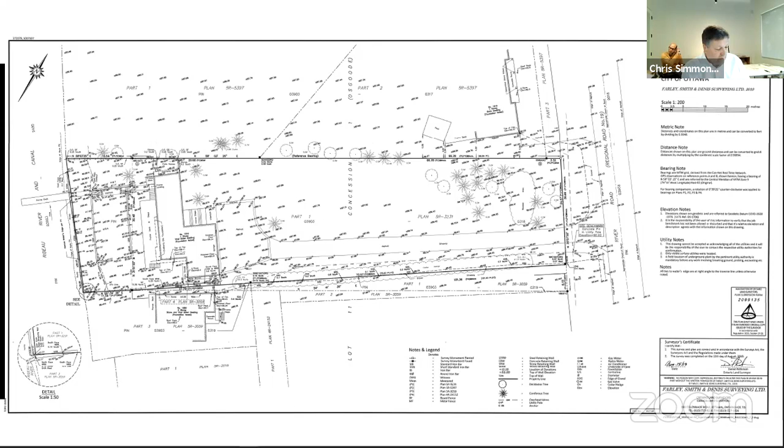One of the strange things about the survey is that the location of the building is referenced to the foundation, and the actual house extends out sometimes 3 feet beyond that foundation. We have clarified the exact dimensions on our site plans and so on. I don't know if that has created some confusion on the part of some people reading the plans. Next, please.

So this is a shot of the front of the house. It's a raised bungalow with 3 garage doors. To the left is the adjacent house. Next shot, please.

It's just another view showing you where that house is relative to the property of my client. Next, please. That's looking the other direction along the house on the road side. I don't know if you can catch that the edge of the house is beyond the stone-clad foundation by a couple of feet there. Next shot, please. That's just another general shot of the road side of the house. Next, please.

And that's a shot of the back of the house. You can see it is very much a bungalow. Adjacent houses to the right of the screen and beyond that are both 2-story houses. And our general intention is to change the roof shape and add a partial 2nd floor on the house. Next shot, please.

I think this is the most important illustration. There's an existing deck, which is 16 meters from the normal water's edge. My understanding is from the Conservation Authority's point of view and the city's point of view, therefore, that the 30-meter setback is measured to the deck and the existing house does not comply. We understand that the Conservation Authority would normally want 15 meters from the floodplain contour, and the floodplain contour and the 15-meter setback are shown in green lines.

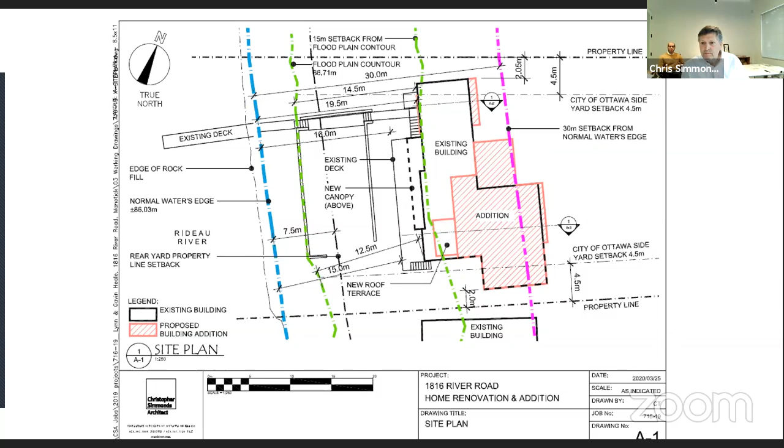We're showing 2.05 meters from the corner of the proposed little extension. Now, I understand there was a typo in the public notice saying we required 2.15 meters, and we've been told by the committee secretary or one of the members of the administration that at this hearing we can therefore only ask for 2.15. I've talked to my client, and rather than delay our hearing today, they would rather decrease the width of that proposed extension so that the variance we're asking for is only for 2.15.

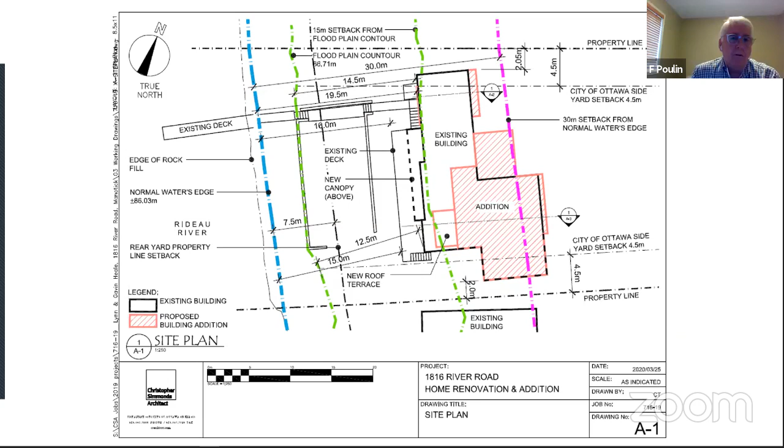So just to explain a little bit more, or should I stop and receive questions at this point, Mr. Chair? Only if you think you have more to add that'll help with your application. Otherwise, we'll proceed on. I have more to add, so okay.

I will just show you, if you go to the next shot. So at the top is the roadside elevation, at the bottom is the current riverside elevation. I'll point out that the building is very low and well below the height limit, which is around 11 meters or so. You can see that the garage from the riverside has a garage door, which is being kept, and it is actually quite a tall structure that's there right now in the garage. It's got a monopitch roof on it.

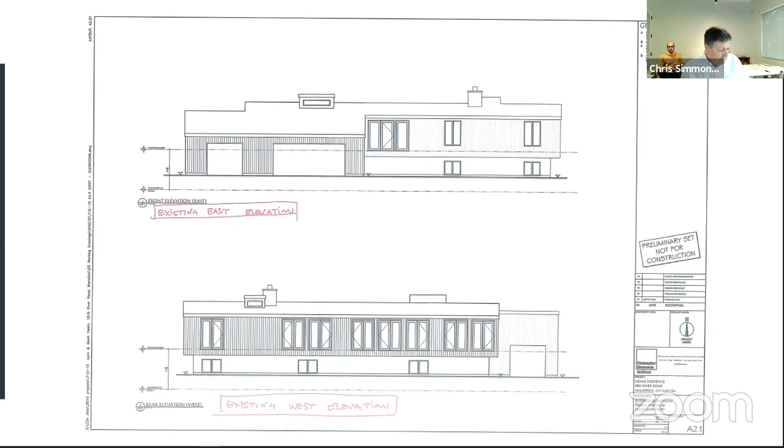And the next shot, if you wouldn't mind, illustrates the side elevations. The top one is the north elevation, which is very straightforward. The one below it is the existing south elevation, which faces an adjacent house. You can also see a cross section.

Now the proposed addition will sit above the garage, not up way high, but fairly low. So it's not really a full second story that we're adding, but in a sense a partial second story. It looks like the second story from the street. Next shot, please.

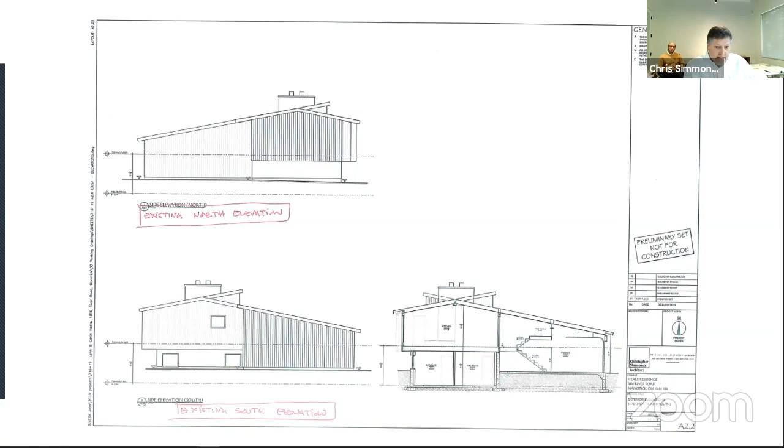And this is the revised profile of the rear. Whoop, go back one, please. You can see on the right-hand side, the black dashed line above the garage door represents the current height, and then the new roof above it. You can see that the midpoint height of the roof is well below, over 3.5 meters below the maximum building height for the zoning bylaw. And we're keeping the existing footprint. Move on, please.

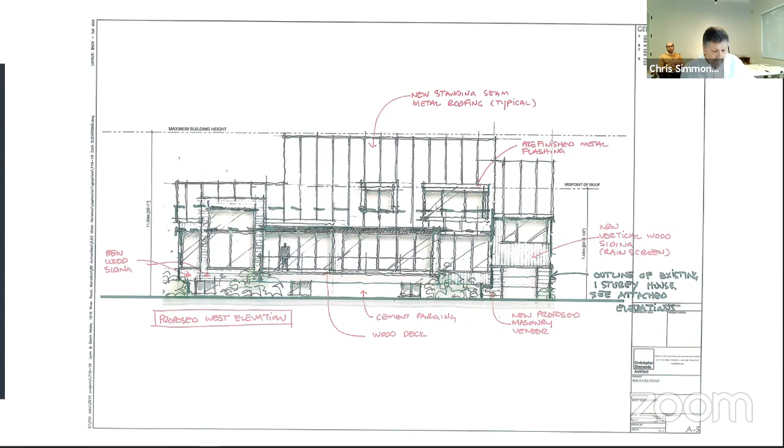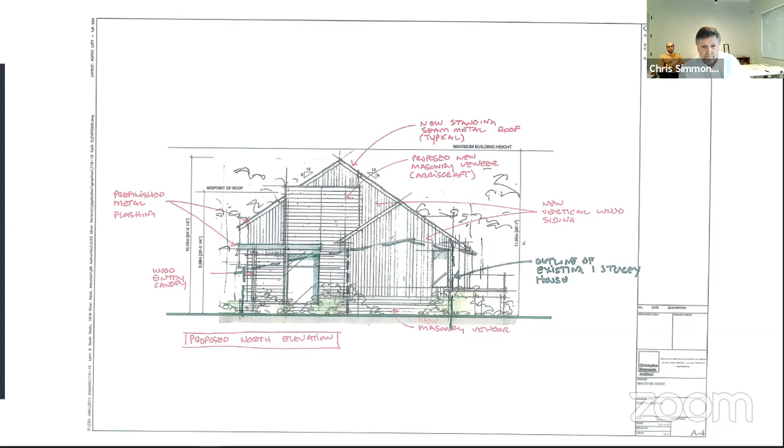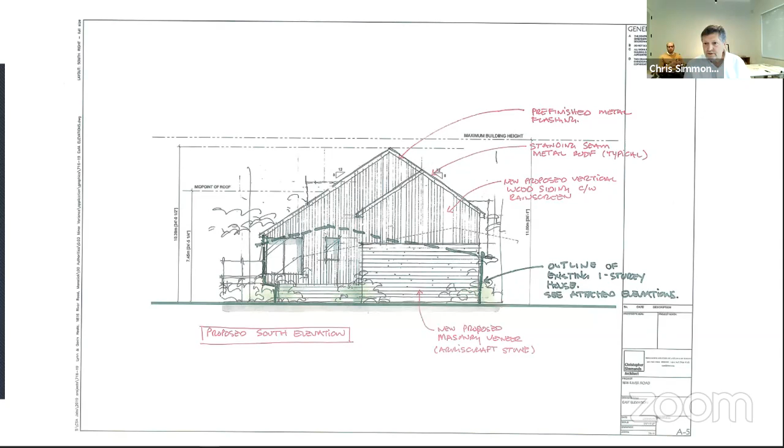All right. Okay, I think at this point I've essentially described the project to my satisfaction. I do have some slides in preparation for a couple of comments that I received, but for preservation of time constraints, I propose to leave off my presentation and just come back to answer any questions that are posed. Thank you.

Thank you, Mr. Simmonds. Mr. Walker, can you please give us some comments for the city and PIED? Oh, I'm sorry, it's Anissa, Miss McAlpine, my apologies. Thank you, Mr. Chair. I should start by indicating that I have not had the chance to review any of the information that was provided here today by Mr. Simmonds. I have reviewed what was circulated.

So there were 3 minor variances requested, and the department has different positions and concerns with each of them. I will commence by reiterating my comment on the first minor variance requested, which was, as I understood it, to permit a reduced setback to the existing deck, as indicated in the notice, as well as the 7.5-meter setback described in the notice, which was what was drawn on the plan. And in my comment, I indicated that the committee should not be issuing minor variances for existing structures.

As I understand it, the deck predates zoning bylaw 2008-250, and it was my understanding that the item should be crossed off. So we'll remove that particular request for that minor variance.

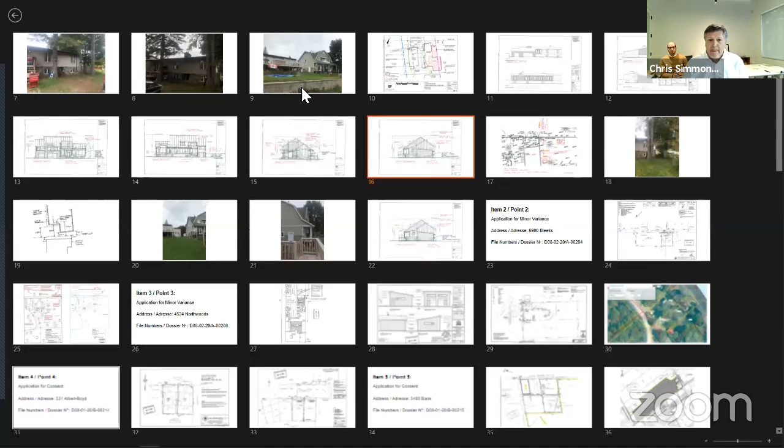Could you flip back to the colored-in site plan? We provided this to them, did we not? So this diagram was provided in the application, and it clearly illustrates where the floodplain is and the top of bank. There is a bank right there in the form of a retaining wall, and we clearly illustrated in the green setback line where the 15 meters occurred, and we clearly illustrated where the 30 meters line occurs.

So this has been in with the committee since day one. In fact, they lost the first one and resubmitted it, and they had it all over again. So this has been in possession of the committee. Now, I don't want to have a partial approval here. If the only way that the committee can approve this is to defer and let Ms. McAlpine review these documents and talk to us about it, we'll have to do that. But I just want to point out we've clearly got all this stuff in your hands.

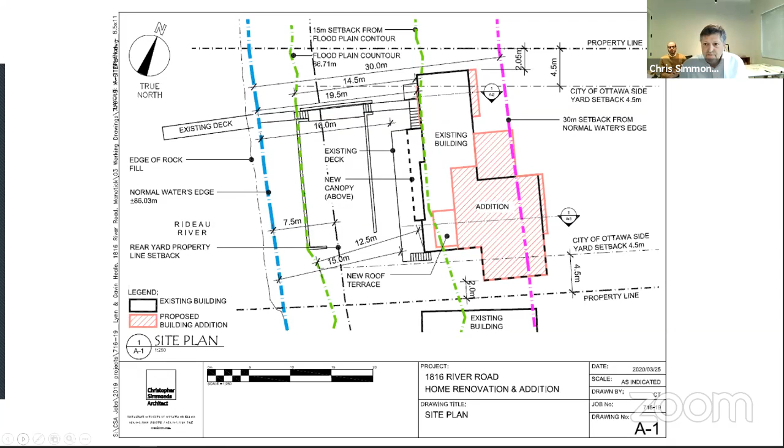Could we flip through a little bit further to where we were before? Yes, so just go on to the next slide, please. All right, so what I want to illustrate here is the location of the tree, which Ms. McAlpine was concerned about, Mr. Chair.

The new addition that we're proposing does not have foundations. It cantilevers towards the tree. The distance to the tree trunk at its closest point is going to be 2.4 meters. It's currently 3.3. And there are no lower branches in that area.

The amount of the distance at the side of the house right now is about 2.3 meters. We're proposing to add new siding and insulation on the outside of the existing house, and also because of the angle of the house, we'll lose a couple more inches as we project forward. So really only talking about...

0.15 to 0.2 meters, 6 or 8 inches increase encroachment at the side. It's plenty of room to get a bobcat through, though not enough for a large truck. However, there is a drive-through garage on the property which will be retained, and there is no house to the north.

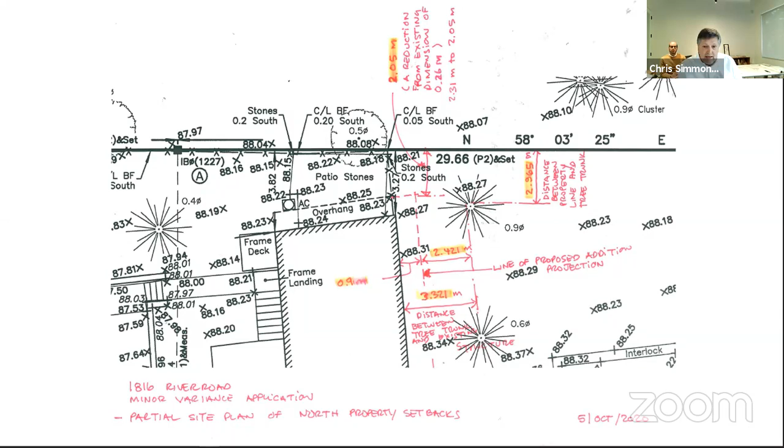If you could flip to the next picture, please. That's a shot showing the location of the tree, the fence, and the property line.

There is a tree on the neighbor's property which constrains things. You can see that there are no low branches on this tree. We're not proposing to dig around it in any way, so I don't think we're endangering the tree.

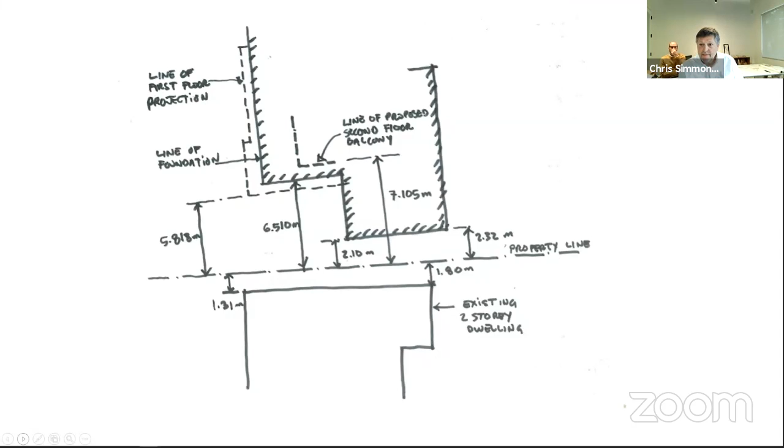Next shot, please. All right, I think you can go back. That is my response to Ms. McAlpine's comments, Mr. Chair. Thank you very much.

The conservation partners, can I ask the conservation partners if they have any comments?

Through the chair, yes, the applicant had approached us prior to submitting the application, which we reviewed. As detailed by Mr. Simmonds, the floodplain encroaches onto the property, but not beyond the retaining wall. The 15 meters referred to by Mr. Simmonds references our regulation limit. By virtue of that 15 meters, the majority of the addition, the house portion, would actually be beyond our regulation limit within the 30 meters.

The elements that would be within our regulation limit are the canopy over the deck, which as shown on the plan isn't closer than the existing deck. It protrudes out a little bit, but doesn't cover the entire deck. There's a bit of a terrace on the second floor that would fall within our regulation limit, but ultimately the proposal being largely over the existing structure was not a concern to the Conservation Authority in terms of the work.

The comments that Ms. McAlpine mentioned in terms of how they're measuring the setback, I defer to the city in terms of how they're going to approach the number in the variance. But at the end of the day, the proposal itself would be consistent with the goals and objectives we're trying to protect. Thank you.

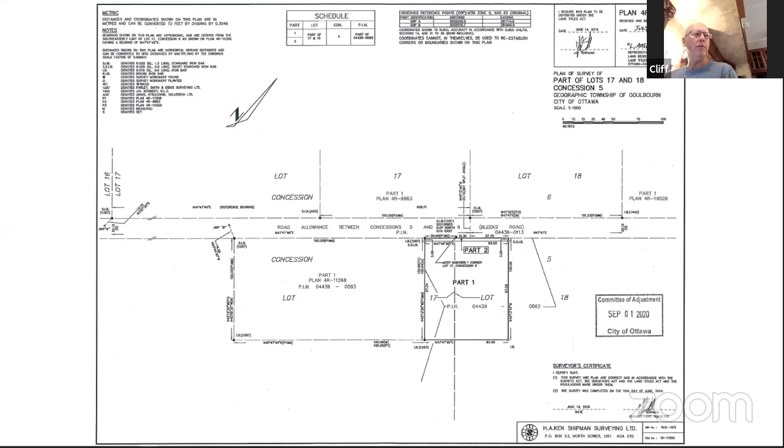Up until the point that we're at this particular minor variance now, I've not been able to get the permit issued. So the minor variances are sought to allow us to have the permit issued so that we can begin the build. Again, it's getting late enough in the year that we may have to delay again, but nonetheless, we want to proceed. It's even more important now to have affordable access to home ownership—it's gone absolutely crazy out there. So that, in a nutshell, is where we're at.

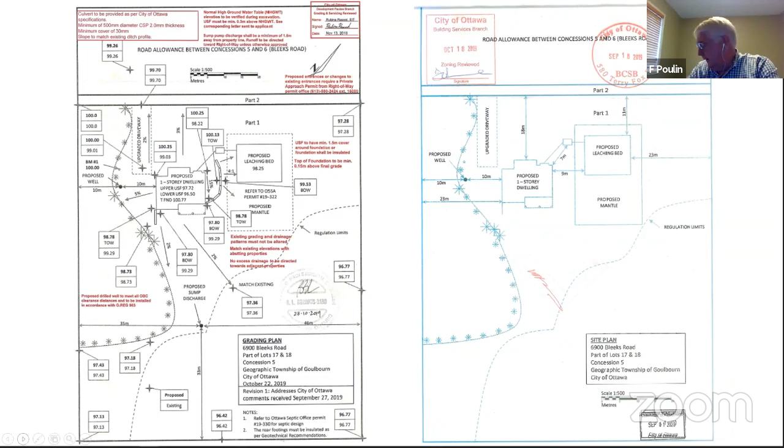Thank you, Mr. Poulin. I'd like to ask Mr. Walker on behalf of the city to make some comments. Thank you, Mr. Chair. Staff has reviewed the application and has no concerns with the proposal.

Thank you very much. Panel, I'd like to ask Mr. Lewis if he has any comments or questions. Yeah, a comment to Mr. Walker: the entrance for this lot will be onto an unopened road allowance, am I correct? Yes, that's correct. So is the city's position that we can do this now? We haven't been able to. So, through you, Mr. Chair, the department reviews applications on a case-by-case basis, and in this particular circumstance, the department has no concerns. The applicant is working with building code services and planning services to have the variances granted and have the building permit issued so that they can have access to the property.

So have we got confirmation from the road department? We have a snowplow goes down, a school bus goes down, hydro goes down, garbage truck goes down, mail car goes down.

So while I can't speak for every department in the city, I can confirm that planning services is working along with building code services so that the applicant can have their permit issued so they can have access to the property. I have a real problem with having access down an unopened road allowance. We've never allowed that before unless the applicant built the road up to standards.

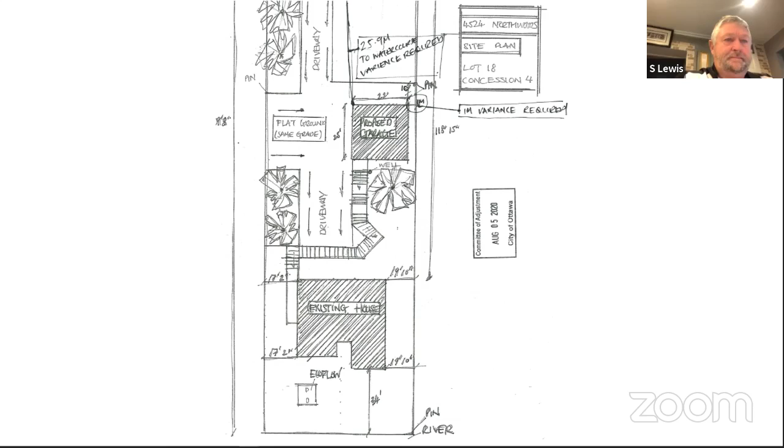So what I'm proposing is a detached double garage on my property. I live out in Woodlawn, and the dimensions are 22 by 25, and I'm applying for 2 variances today. One is within a 30-meter setback of a watercourse, which is not really much of a watercourse—I think it's more of a ditch from my neighbor's yard across the street, but that is outlined in the survey. The other is to reduce the interior setback from my neighbor's yard to mine down to 1 meter.

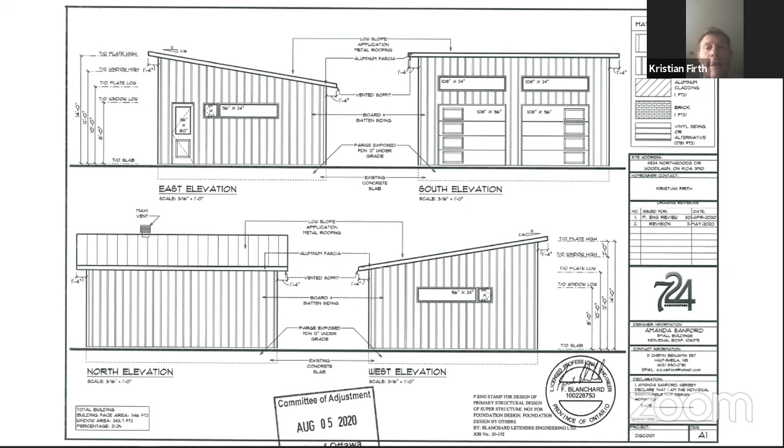So as you can see, it's a lean-to roof, 14 feet at the front going down to 10 at the back, so it's lower than both my neighbors' garages. If you want to scroll through again, you can probably see a cross-section drawing there. There's the site survey—on the right-hand side there is the Ottawa River, Buckham's Bay, which is significantly far away from where the garage pad is, about 200 feet.

If you look to the left-hand side, you'll see where the city road is, Northwoods Drive. The actual watercourse itself is to the left of there. So the distance I'm requesting is 25.9 meters from the 30-meter setback required from a typical watercourse. I wish I had more detail—it's not as detailed as the first application. I'm just applying for a double garage with 2 variances.

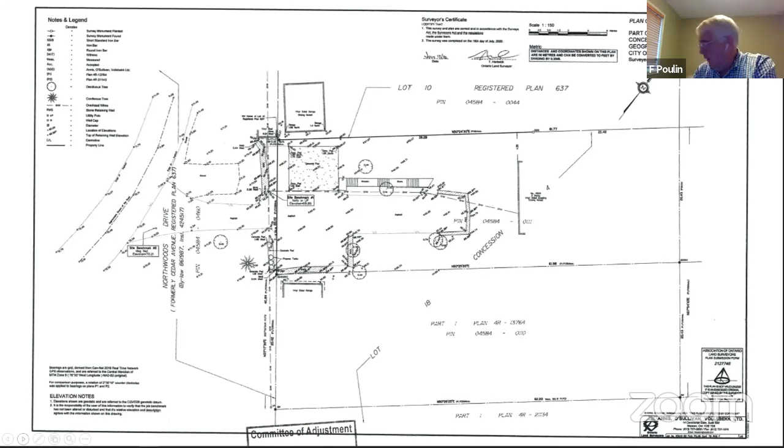Thank you, Mr. Firth. I'd like to ask Mr. Walker to make some comments on behalf of the city, please. Thank you, Mr. Chair. The department has reviewed the application and has no concerns with it. Staff is satisfied that the 4 tests are met in this instance. Staff, thank you very much.

Thank you, Mr. Walker. Any comments, Mr. Vivort? No, I'm fine with it. It seems to meet the 4 tests, and I believe the conservation partners in this case are also satisfied. Thank you. Mr. Otto, any comments, questions, or concerns? No comments, thank you. Mr. Lewis? Nope, nothing. Ms. Chandler? No concerns.

Okay, thank you very much. I'd like to ask the committee if they'd like to approve this application. All in favor? Your application is approved, Mr. Firth. Thank you very much for your time. You're welcome.

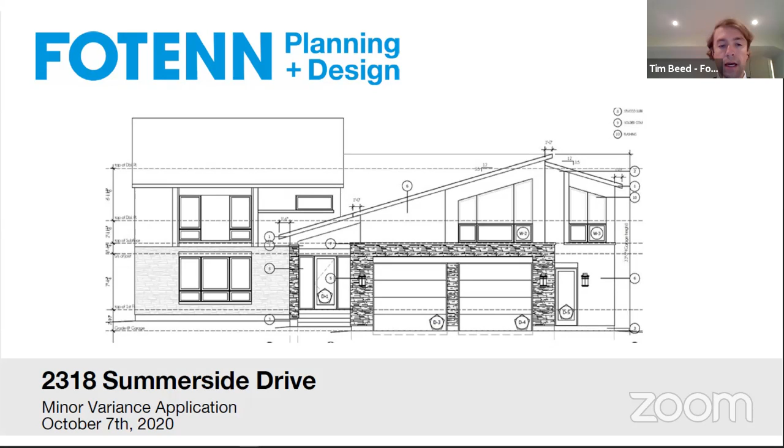I'll go through quickly and then leave some time for questions at the end. The subject property, and I'll go to the next slide, please.

In the area, residential properties are located directly north, south, and east of the property, abutting the Rideau River. Further afield, the area consists of more rural residential properties, agricultural and woodland, located approximately 7 kilometers from the village of Manotick, 3.5 from the village of Kars. Next slide, please.

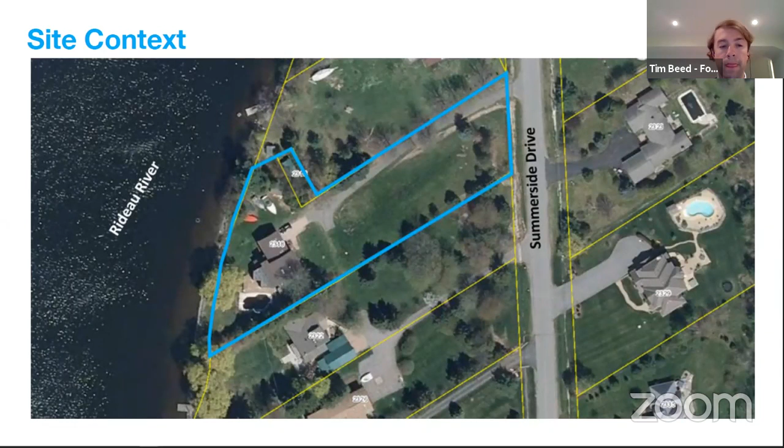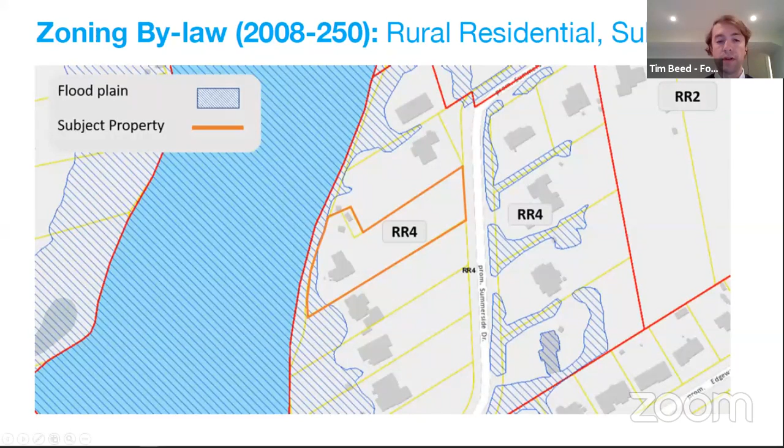I'll get back to the zoning and official plan designation in the rationale to provide some context. The subject property is currently zoned rural residential, subzone 4, with floodplain overlay on the portion abutting the river, on a small portion of the property. It's designated general rural area in the official plan.

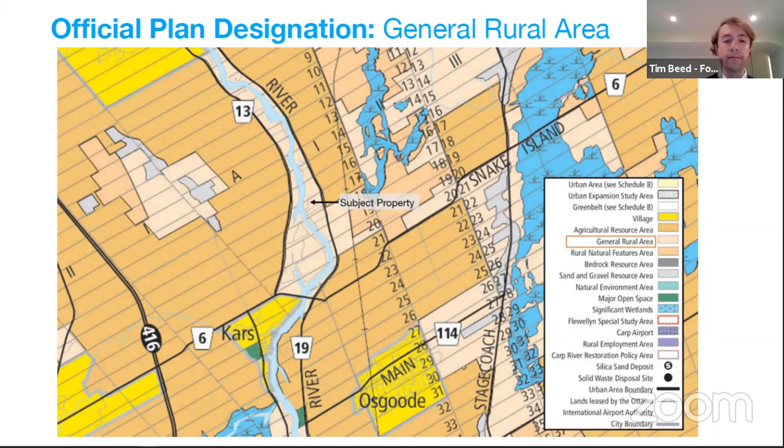Next slide, please. So I'll get into the details of the application. The application for minor variance pertains to 3 separate yet concurrent construction projects on the property, as detailed throughout this presentation. In summary, the property owner proposes to construct a 2-story addition to the existing detached dwelling.

And a two-story addition to the existing detached dwelling consisting of a garage and home office in the front yard. The proposed addition is 2 stories, 7.2 meters in height, with a total gross floor area of around 92 square meters. We can see that in the foreground there.

The second portion of this application is a second-story deck at the rear of the subject detached dwelling, with a total area of 29.5 square meters and a height of 2.74 meters from grade. That's the triangular portion in orange here, kind of in between the existing corners of the existing dwelling.

The third aspect of this application is an addition to the existing accessory building located along the northern property line. The proposal is to renovate the existing accessory building, which currently has a floor area of around 20 square meters, located 8.5 meters from the property line to the north and 1.74 meters from the eastern property line. The proposed addition will extend from the south facade of the existing building, resulting in a total cumulative area of 43.9 square meters and a new setback to the eastern property line of 0.93 meters, with a maximum height of around 3 meters. The areas of construction are indicated in orange.

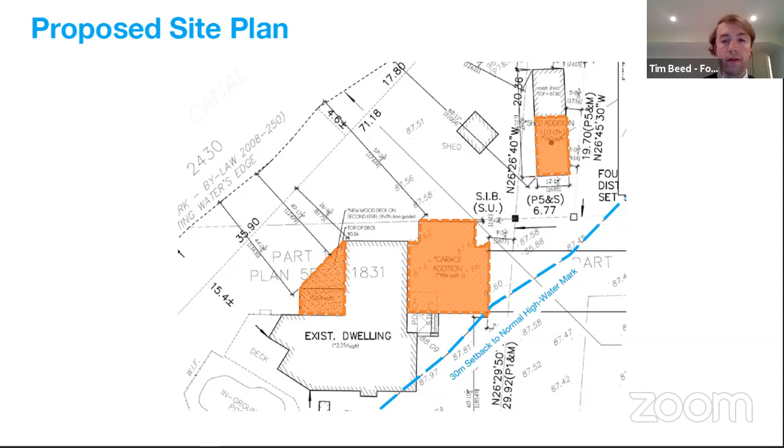I'll go over a few slides here. The proposed addition to the detached home is seen on the screen here as a 2-story garage and office building.

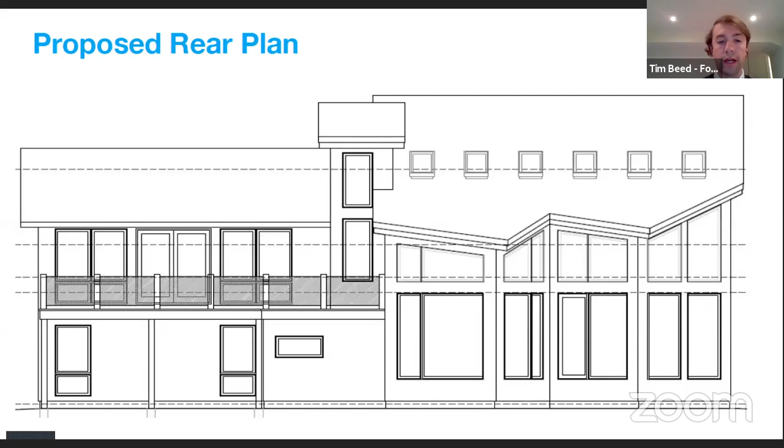Here we can see an elevation of the proposed two-story deck to the side and rear of the property, and another elevation showcasing both the proposed 2-story addition to the garage and office space attached to the existing dwelling, as well as the deck to the side and rear.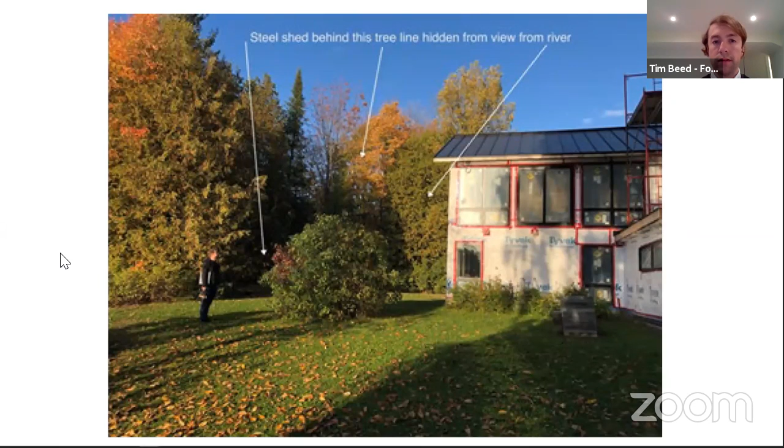Another angle or viewpoint of the significant tree grove, which will screen the proposed additions from the river viewplanes and from neighboring properties.

This is indicating where the proposed new second-story deck will fit into the existing built form of the single detached home, so it won't protrude in any way from the existing footprint.

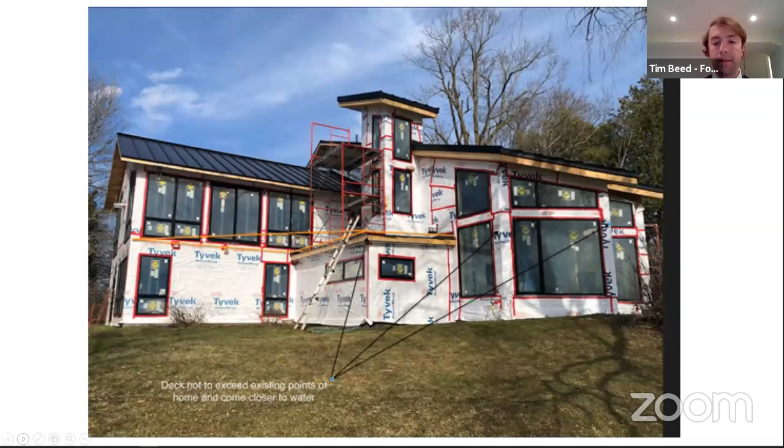I'll go over a few key points on how this project addresses the test of a minor variance. As mentioned earlier, the subject property is designated general rural area in the official plan. The general rural area permits a range of land uses meant to be appropriate and compatible for a rural location. The proposed variances conform to the relevant policies of the general area and maintain the intent of the designation to preserve rural character and scale of development. These are all modest additions to the existing built form on the property.

Most importantly, the variances being considered relate to how they impact adjacent properties. The overall design of the proposed development will complement the massing patterns, rhythm, and character of the existing dwelling, using similar, complementary, and respectful materials and low-profile massing to integrate into the area.

In regard to proximity to the watercourse, the proposed garage and office addition is located so that it will be buffered from the river by the existing primary dwelling. The remainder of the addition to the accessory building is set back significantly from the high water mark and benefits from existing substantial tree cover. The proposed second-story deck fits within the existing built form and is actually closer to conformance than many portions of the existing buildings.

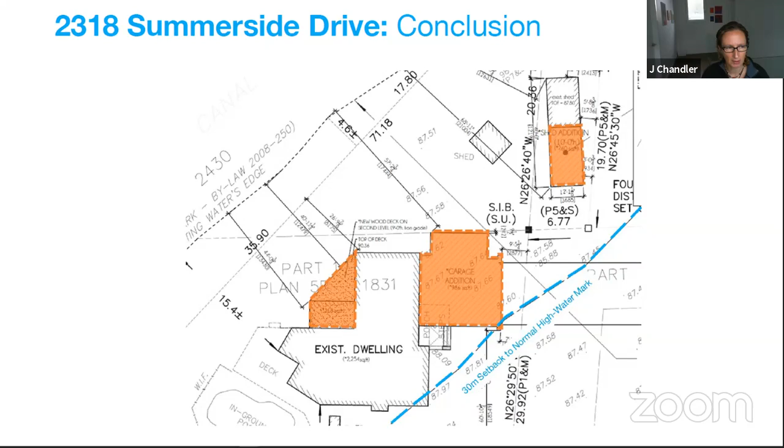I guess my question would be to the Conservation Authority. You mentioned a regulatory permit has already been issued for the garage addition. Is that correct? Yeah, through the chair, that is correct. A predecessor of mine had reviewed the garage and issued a permit for the garage component only.

And then through the construction or planning process, they've decided to include these other components to do them all at the same time. That's why we're going to require a revision to the existing permit, as well as basically a new review for the two other components that have been integrated. We've had discussions with the applicant on how to address those.

So again, I'm not particularly concerned about the deck or the addition to the auxiliary structure, but regulatory permits aside, is it your professional planning opinion that that part of the variance does meet the four tests? Through the chair, I believe so. Thank you.

Mr. Revord, any questions, comments, or concerns? None, thank you. Mr. Otto, any questions or comments or concerns? No, I'm okay, thank you. Mr. Lewis, any questions or comments or concerns? No, I'm good with this application, thanks.

Okay, thank you. I'd like to ask the panel to approve this application. All those in favor? Your application is approved, Mr. Beed. Thank you very much. Thank you, Mr. Chair and committee.

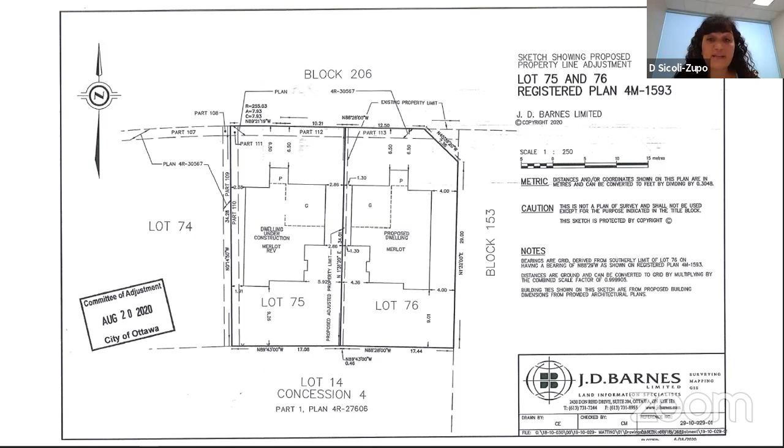So what happened is a draft R plan, which I believe you have as well, has been created, which has the strip of 0.46 meters from front to back, being parts 1 and 2 on the draft R plan, carved out. The application today is to sever the 0.46 meters from lot 75 and add it to lot 76 to accommodate the home to be built on lot 76.

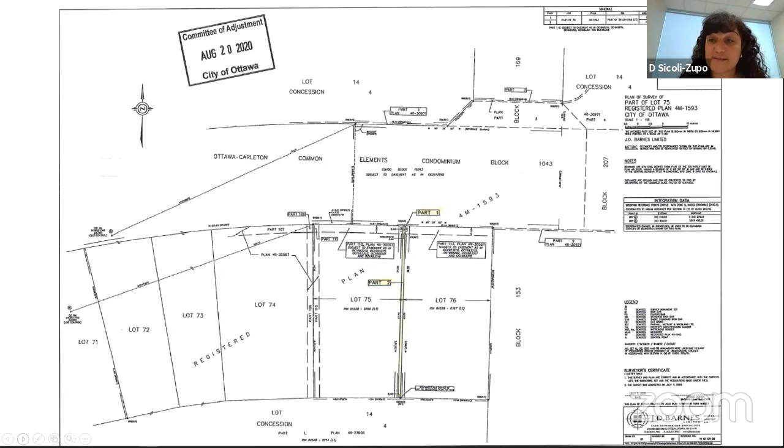Okay, thank you. Ms. McAlpine, could you please give us an overview of the city's comments? Thank you, Mr. Chair. Through you, Mr. Chair, the city has no concerns about the application and simply asks that should the application be approved, the standard conditions included in my report be included.

Thank you, Ms. McAlpine. Mr. Revord, any questions or comments? None, thank you. Mr. Lewis, any questions or comments? I could not hear you, your mic is muted. No, I'm good with the application.

Thank you. Thank you, Mr. Otto, any questions or comments? I'm good with it, thank you. Ms. Chandler, any questions or comments? No, all good, thank you very much.

I'd like to ask the committee to approve this application. All in favor, please raise your hand. Your application is approved, Ms. Sicoli-Zupo. Thank you very much. Thank you.

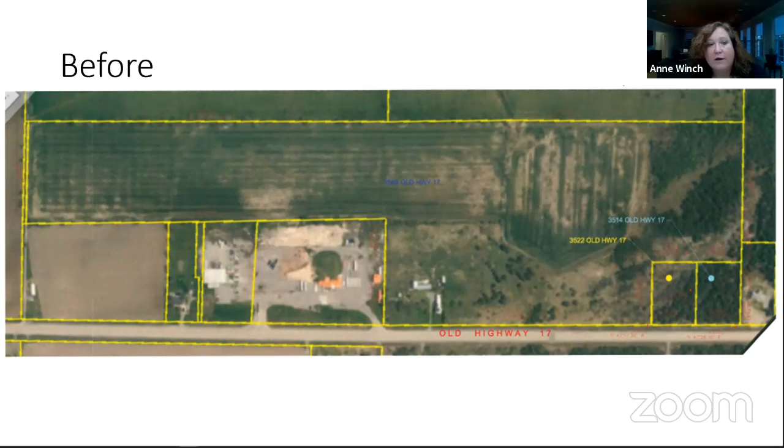Thank you. Please proceed and provide a brief explanation of your application today. So I'm working with the Burdens, and they have a property on Highway 17. Originally they had a farm and 2 lots that had previously been severed. What we're doing is a lot line adjustment to attach one of the lots that has road access from Old Highway 17 to incorporate a parcel of land at the back. As you can see, the one on the far right is the before - there's 3 lots and then the entire parcel. Now we're going to show the after photo. So the after photo shows adjusting the lot line to incorporate the parcel at the back, giving road allowance at Old Highway 17, creating or adjusting the lot line for the parcel with the house and barn, and then retaining the original lot.

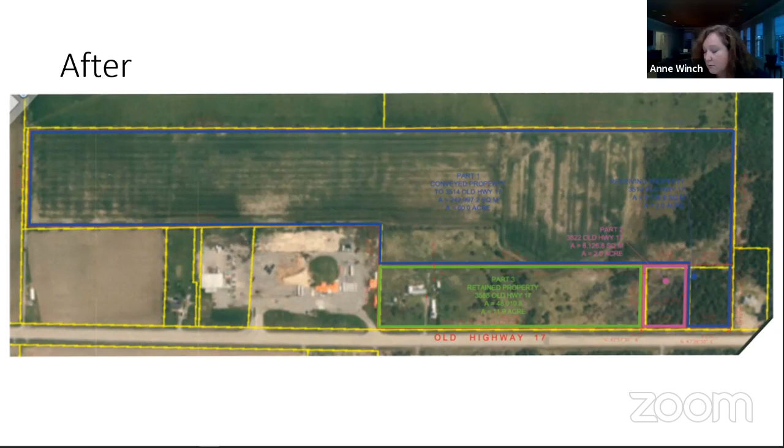Thank you. Mr. Walker, can I ask you to comment on behalf of the city? Thank you, Mr. Chair. The department has reviewed the application and has no concerns with the proposal, subject to the condition submitted. Thank you very much, Mr. Walker. Do our conservation partners have any comments to make? Through you, Mr. Chair, no, the Conservation Authority has no concerns with the application. Thank you very much, Ms. Ogden.

Now I'd like to proceed to the panel, ask if they have any questions or comments. Mr. Otto, any questions or comments with respect to this application? Oh, it's perfectly clear, thank you. Mr. Revord? No comment or question. Mr. Lewis? All good. Ms. Chandler? I have no comments. Thank you very much, I'd like to ask the panel for approval of this application.

All in favor of the approval of this application? Thank you. Your application is approved, Ms. Winch. Great, thank you very much. Thank you.

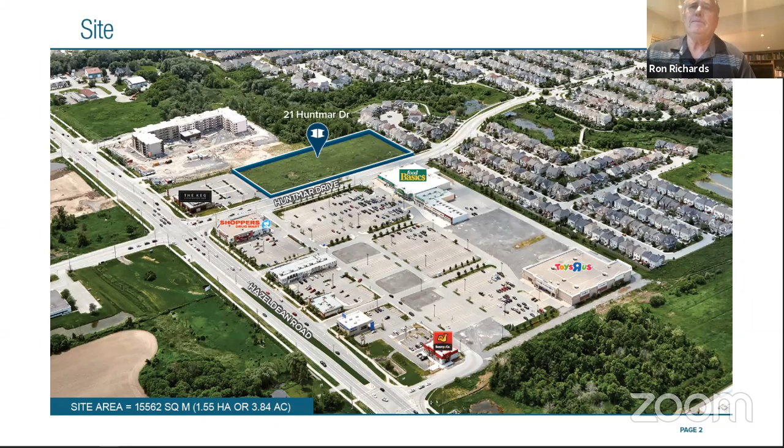The requested variance is for an additional 5.8 meters in height over the permitted 15 meters, for a total of 20.8 meters. The minor variance is required to accommodate 1 additional floor and increased height per floor. The bylaw permits 5 stories at 3 meters per story, which in today's world is very difficult to build within, given increased ground floor ceilings for amenity areas in the lobby and an increased height per floor to accommodate the cold form steel framing I-span construction method, which includes a concrete floor for each level.

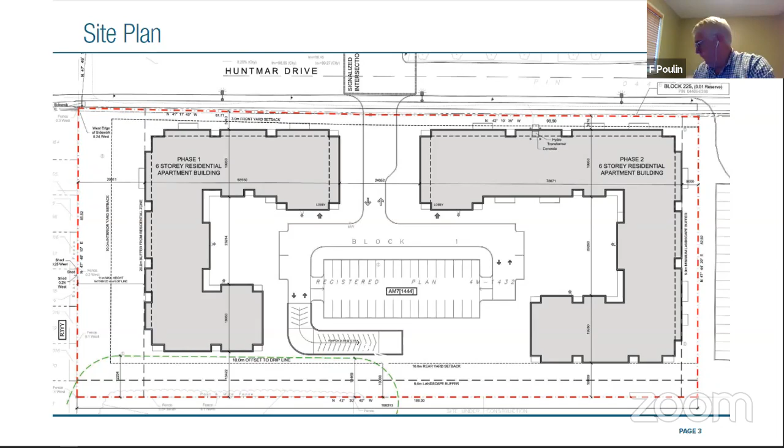Thank you. Thank you very much. Ms. Ramirez, are you able to comment on behalf of the city?

Hello, yes, through you, Mr. Chair. Staff have no concern with the minor variance to permit a building height of 20.8 meters for a building located greater than 20 meters from a residential zone. The department requests that any approval be worded to allow for modifications during the site plan control process.

Thank you, Ms. Ramirez. And I note that Victoria McCrum is also listed here. Yes, Ms. McCrum is a colleague of mine, and unless there are specific questions, no need for her to comment. Okay, thank you very much.

Thank you. I'd like to ask the panel for their comments. Mr. Lewis, any questions or comments? No comments, I'm good with this one. Thank you very much. Mr. Otto, any questions or comments? And thank you. Thank you.

Ms. Chandler, any questions or comments? None. Thank you. Mr. Vervoort, any questions or comments? I don't have any concern with it because it's going through site plan. I just wanted to confirm that this isn't increasing the density, the number of units - I think they are staying the same. Is that correct? That is correct. Okay, thank you.

Given that there's no further comments, I'd like to ask the panel for approval of this application. All in favor? Your application is approved, Mr. Richards. Thank you very much. Thank you very much, Mr. Chairman.

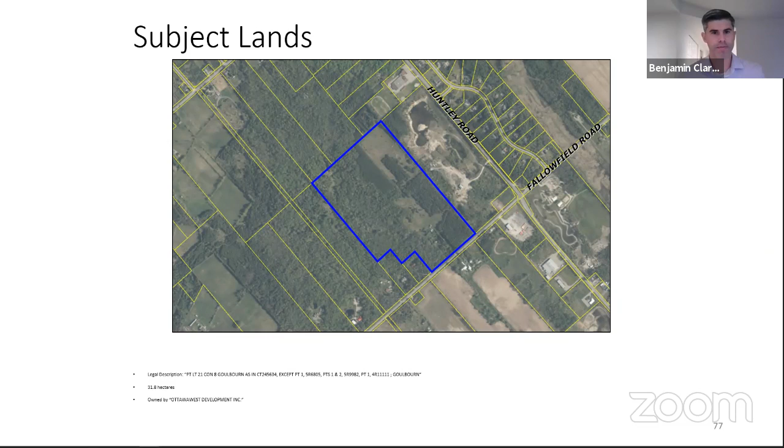So the subject lands, committee and staff are familiar, 31.8 hectares, southwest of Huntley and Fallowfield Road intersection, just south of Stittsville and Goulbourn. Next slide, please.

This is a severance sketch. Now this severance is now conditionally approved. Committee members will recall that the lands have development potential, but that there are several constraints, including from a natural heritage standpoint, in relation to a proposed livestock facility, stables, the floodplain, and adjacent properties that have potential for aggregate extraction. Next slide, please.

These are the retained lands, which are the focus of the variance application. They're 21.3 hectares and have approximately 113 meters of frontage on Fallowfield Road. Next slide, please.

So this slide identifies the subject lands in the context of their surrounding. The Argue pit, which is a largely inactive pit today, however with an active pit license, it's been used for the most part over the last 20 years as stockpiling for material. It's adjacent to the northeast. It's designated sand and gravel resource area in the city's OP and is zoned ME2 in the zoning bylaw.

Surrounding the Argue pit to the north is the Goulbourn Middle School, and then opposite Huntley Road is approximately 30 residences on Kimini Drive. To the south of the subject lands opposite Fallowfield are largely agricultural lands owned by Walton International. Walton is advertising these lands as having future urbanized development potential. These lands are designated agricultural resource area, however, in the official plan and have ME3 zoning. Next slide, please.

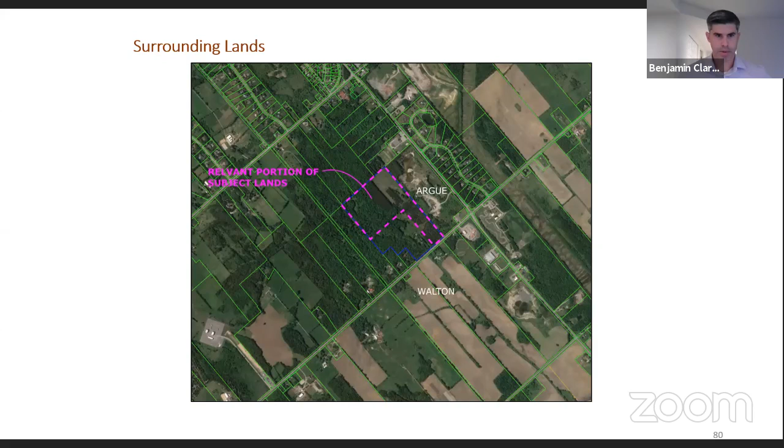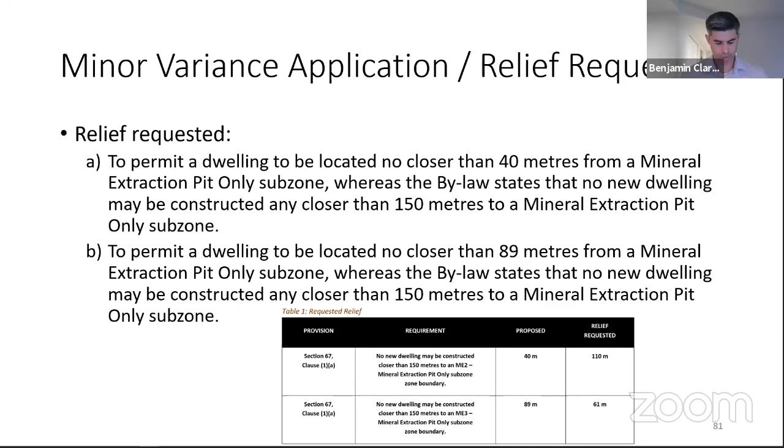So the application in front of us today relates to clause 67, or section 67, of the bylaw. Clause 67(1)(a) requires as-of-right development to be located a minimum of 150 meters from ME2 or ME3 zones, in order to, and I'm quoting here, help ensure that new dwelling units are not located in close proximity to an existing or future noise or vibration generating use such as a mineral extraction operation. This application requests minor and appropriate relief from this requirement to allow a dwelling to be located 40 meters from the ME2 zone, the Argue property, and 89 meters from an ME3 zone, which is the Walton lands opposite Fallowfield. Next slide, please.

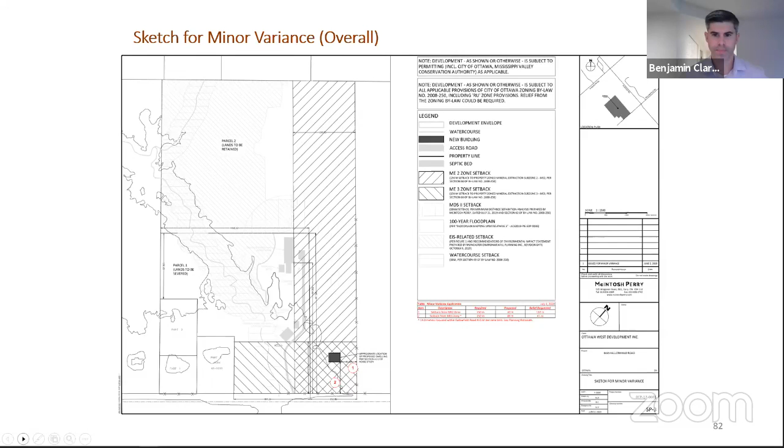So this is close-ups of the sketch. It shows the proposed location of the dwelling, 40 meters from ME2 to the east again. And then you'll see that 75-meter setback is shown from the front property line.

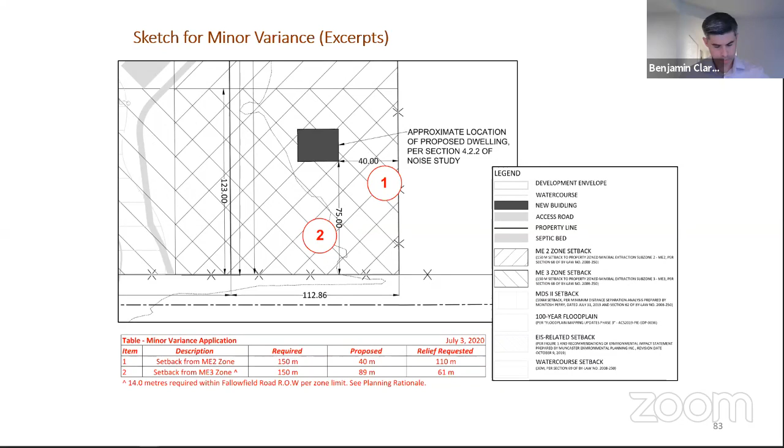The actual relief being requested reflects 89 meters, and that additional 14 meters sits within Fallowfield Road and represents the distance from the front property line to the ME3 zone boundary, which is in the center line of Fallowfield Road. Next slide, please.

I'm going to start in on the 4 tests. So first is the intent and purpose of the OP. The subject lands are designated rural natural features. Policies of the general rural area are also applicable.

Policy 372 establishes that it is intended that the general rural area, and I'm paraphrasing here, accommodates uses appropriate for a rural area, such that development will not preclude or resist other non-residential uses. In this regard, policies of section 374 specific to mineral aggregate resources are probably most relevant to this application.

The noise study goes beyond this and considers, we'll get into it in a moment, the theoretical full operation of the Argue pit, which is the only licensed pit that needs to be considered. It also contemplates the full concurrent extraction operation of the Walton lands and full operation at the Tarstone landscaping facility in the vicinity as well. Batching plants are also reflected in both the model for both of the extraction related properties. Next slide, please.

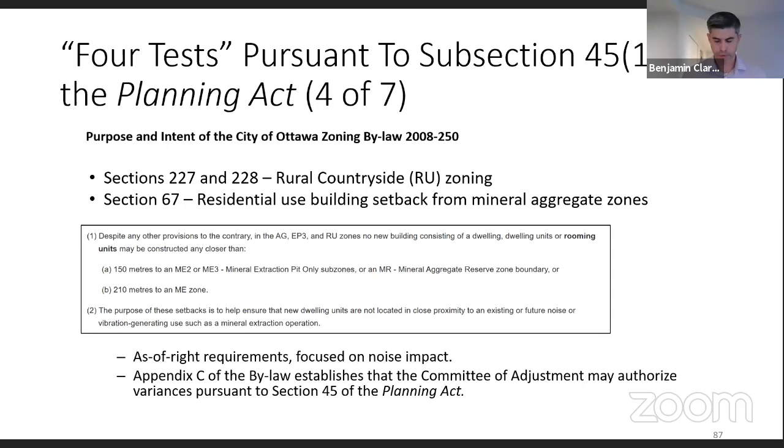What's important to note here is that these provisions apply to unmitigated, unstudied scenarios. It's reasonable to conclude, therefore, that if you provide evidence that confirms that the noise from hypothetical full concurrent operations of 3 noise generating facilities in the area meets the recommended MECP objective sound levels, the intent of the bylaw is upheld. To summarize, the bylaw is concerned with noise. If you prove that noise is acceptable, the intent of the bylaw is maintained.

Next slide, please. So this slide provides a bit of background that explains minor in nature. There's a quote from an OMB decision here that establishes that the minor in nature test is widely accepted as being a test of impact. And it's not any impact, but undue, severe, or unreasonable adverse impact.

This is really important in this one, because to be frank, we're dealing with a big number when it comes to the relief being requested, but that big number is not what needs to be focused on in this particular application. The noise study, again, with respect to minor in nature, confirms that the recommended MECP objective sound levels are met. Next slide, please.

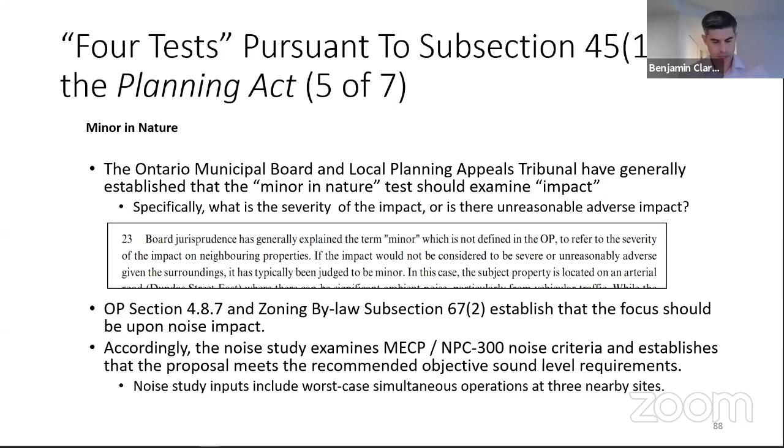Given the very conservative noise study methodology and the low likelihood of full simultaneous operations of the facilities, including the two batching plants, the dwelling and the variances do not represent unreasonable or undue adverse impact.

That's clear to me. This slide contains excerpts from the planning rationale, which refer to the fact that a noise warning clause is also recommended, and this will help prevent any impact upon the nearby aggregate related properties. It's worthwhile noting that the owner of the aggregate operation asked for this clause when consulted during the severance.

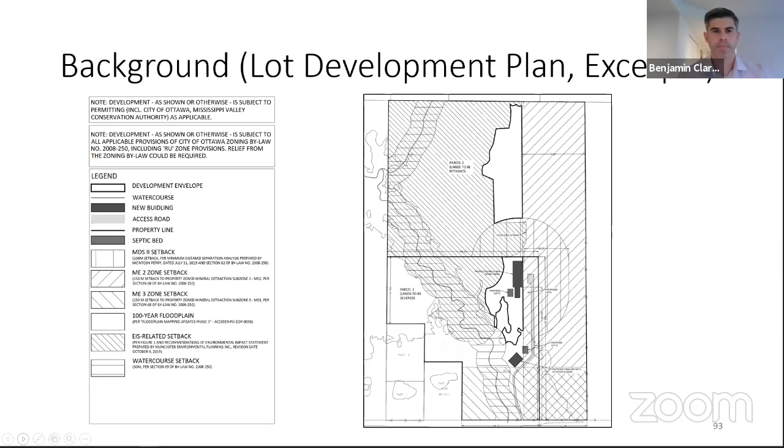Next slide, please. So staff comments, I'll try and keep this as brief as I can. Agency comments largely do not raise any issues. The MVCA does identify the need for a permit given the location of the proposed dwelling within the regulated area, and it's relatively close to the floodplain.

Planning staff comments are not supportive. Staff assert that the proposal represents a departure from what had been discussed during the severance. Trying to keep it brief here, staff are vehement in their defense of PPS and official plan policy that seeks to discourage development in close proximity to aggregate.

Staff asked questions about a berm that had been identified in a previous, preliminary version of the noise study. Staff conclude that the variance, in their opinion, is not minor and that it could impact the viability of aggregate, despite the noise study suggesting otherwise.

Staff's comments, in my opinion, are problematic and in some cases could be misleading to committee members and the reader. It's clear in my mind that the lot development plan was foremost intended to identify as-of-right development potential on the retained and severed parcels, to ensure committee members and staff will be comfortable proceeding.

Variances were in fact discussed openly with staff and committee on several occasions, and the proposed location of the dwelling is the same as it was depicted in the original preliminary noise study. This is explored in detail in my September 23rd response to staff's initial round of comments.

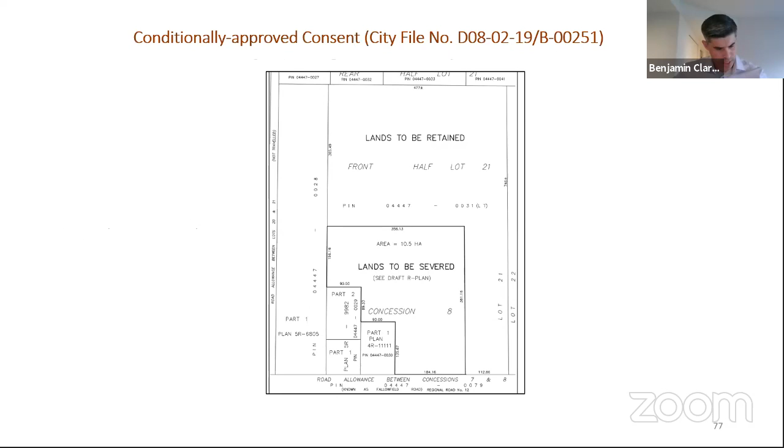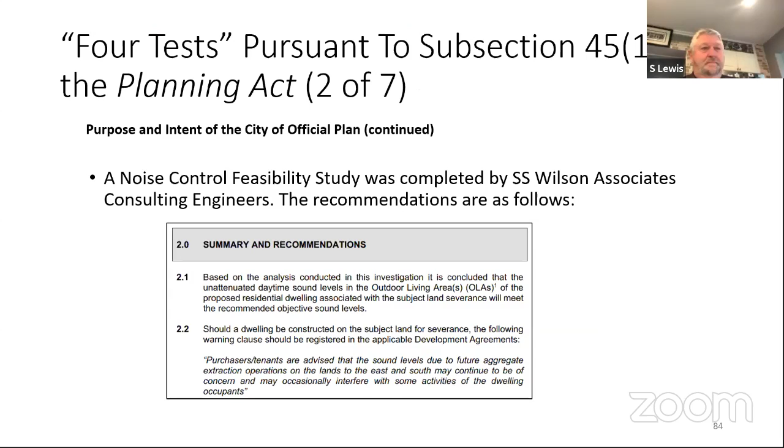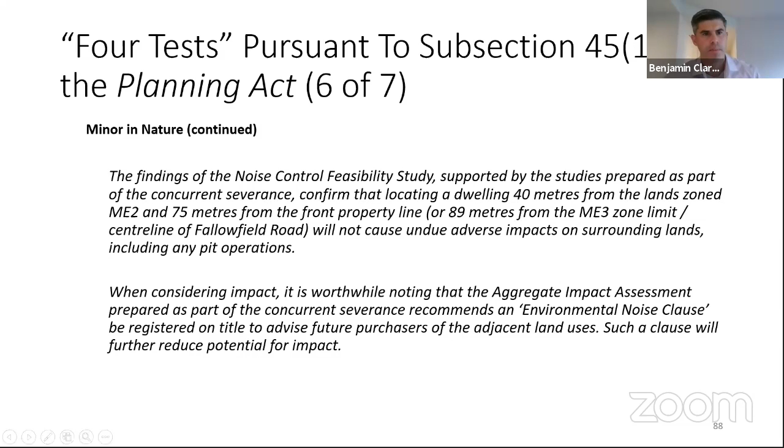This would be, I believe, slide 12, and I don't know which number that is in the committee's slide. I think it's page 6 maybe. Keep going another couple slides. Should be the next one. Oh, my apologies, we're getting ahead, back a couple. One more. Here we go.

So if I'm correct, the noise contours, that's what I'm looking at, right? Were drawn from the existing operation layout? Incorrect, there's no existing operation. So the property, I'm not saying incorrect in an accusatory way, just for clarification, hasn't been used for about 20 years, just for stockpiling of material.

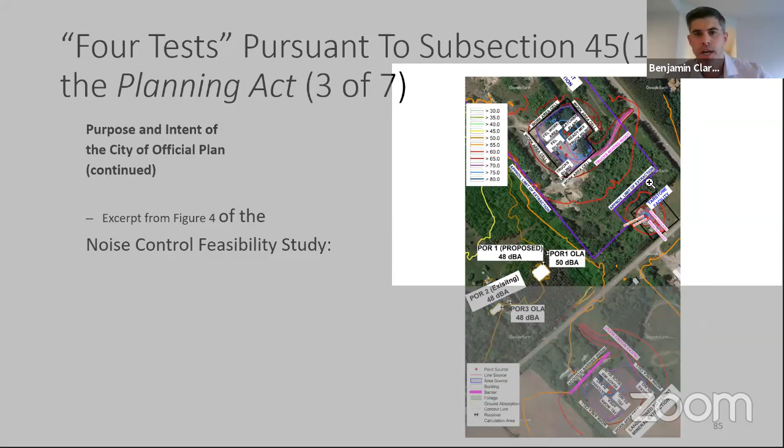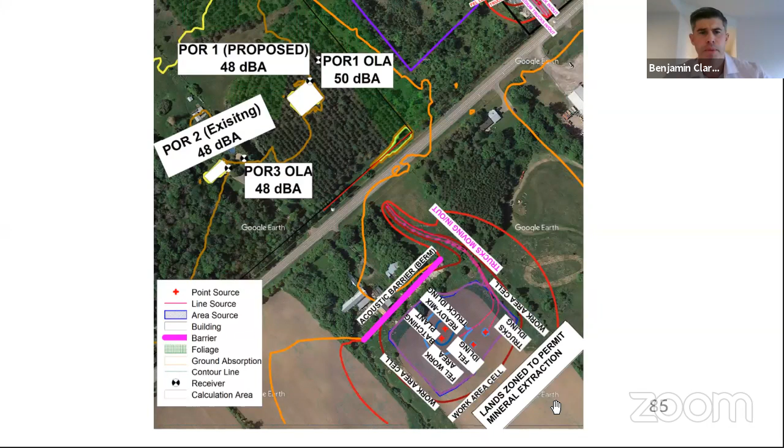So like the quote unquote facility on the Walton lands opposite Fallowfield, Assad and his team have had to come up with assumptions with respect to where a batching plant might go if they pursued ECA approval and got ECA approval to locate a batching plant on the subject lands. Similarly, they make assumptions about the location of trucks idling and so on.

Can you go back up north to the Argue lands coordinator? So there's a site plan associated with this, and it shows a cement batching plant on it as well. Where is that denoted on this? It's within the work cell. The batching plant is kind of in the northeastern quartile of the work area cell.

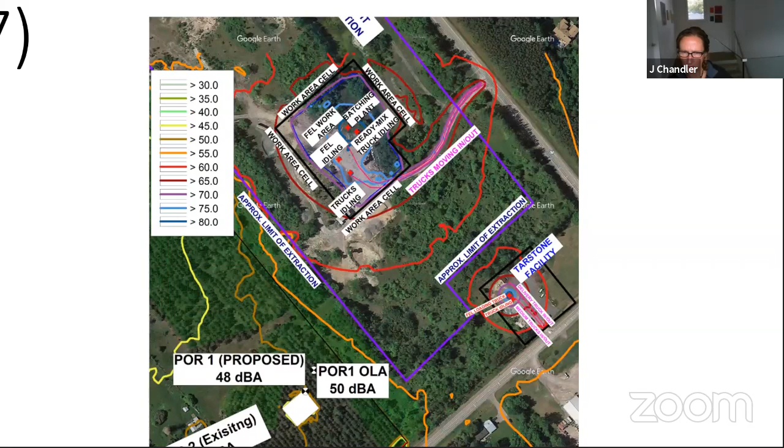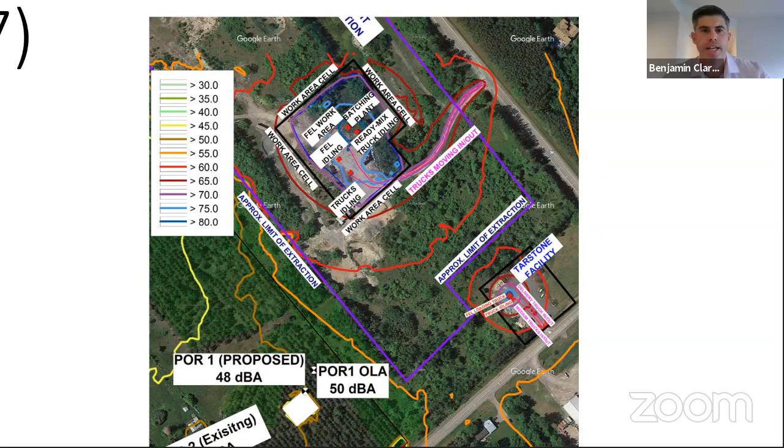All right, so this was done based on the site plan that is approved by MNRF. Well, the site plan that was approved by MNR, and I discussed this with folks who worked in aggregates for decades, for the better parts of their careers at McIntosh Perry. The site plan does include a batching plant, but there's no question that since there hasn't been a batching plant on the subject lands, any new proposal for a batching plant would be looked at as a new proposal requiring an ECA.

So the actual eventual location of the batching plant would, if I was working on these approvals, probably go at a location on the property where the noise impact on adjacent properties is minimum. So you're kind of getting to where my concern is. Yeah.

For an operator on an aggregate site to make any changes, like if Mr. Argue starts running again, he now becomes responsible for managing his operation around all the sensitive uses established around them. He's got a school on the north, residential properties on his east side, can't remember what's on the south, and now we're tucking in a residential use 40 meters away, from the edge of the extraction, 55 meters away from his limit of extraction. Yes, the responsibility is being handed back to the quarry operator to work around this proposed residence.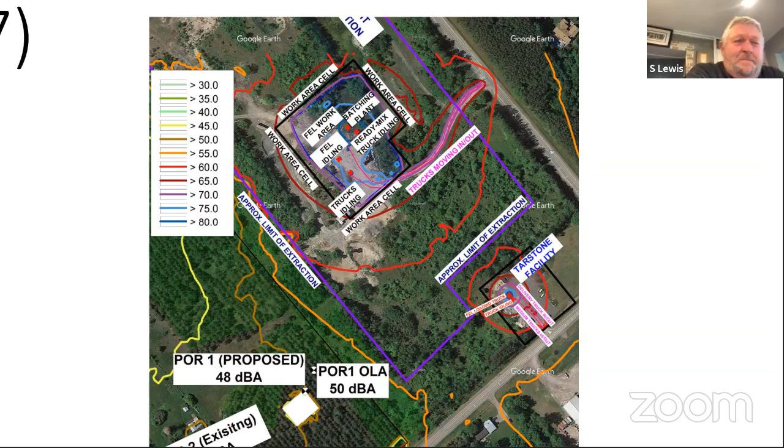Two questions. Number one, there was a berm on it one time. What happened? Where did it go? Assad, do you mind taking that question?

So initially when we started working on the project, we didn't have really detailed topography of the land, and later on we were provided with photos from the client and more details of the topography showing there is a natural, existing berm. So we modeled that into our program using the actual topography. Initially, the berm was placed there on purpose to show that there is an existing berm of some sort, but later, when we got the detailed topography, we were able to remove the berm by using the natural topography and calculate the sound levels at the closest receptor.

Okay, the other question I have is about the noise study. I don't know anything about noise studies, but it seems to me you guys did a noise study that in your mind seems to work, and in the city's mind it doesn't work. Why are we apart there? Just very basic — does the city consider this noise study to rate a 6 out of 10? Does it need to be a 7.5? Why does the noise study not work into the city's plan?

Ms. Turkington? Through you, Mr. Chair, city staff have reviewed the noise study and the updated noise study and are not in agreement with the findings or the conclusions of the noise study.

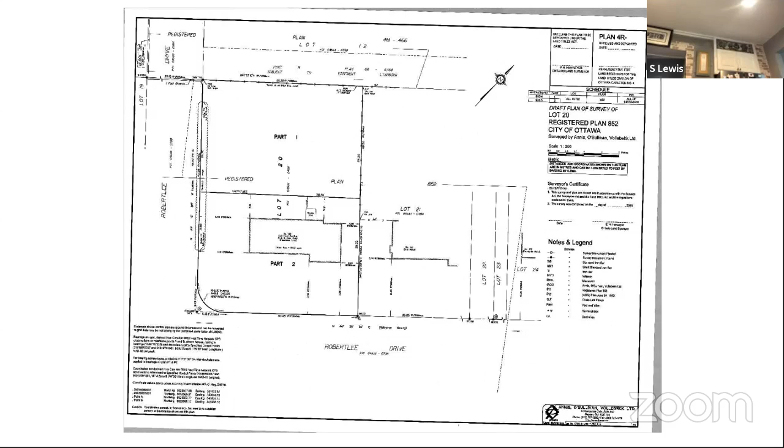I have a few slides here, I'll be fairly quick with them. If we could go to slide number 1 and 2. Here we are. So you can see on the left-hand side part 1 and part 2 of a lot. Part 1 is my proposed severance away from the main lot. You can see the existing dwelling there.

We talked about this the last time we met, and as far as I could glean from the meeting, the minor variances, etc., were agreed upon, except that we had the sticking point of a waterway at the back of the property, and that was deemed to be a water course. Because of that, and the limitations that came with that, there was going to be problems with putting a dwelling in that Part 1 lot.

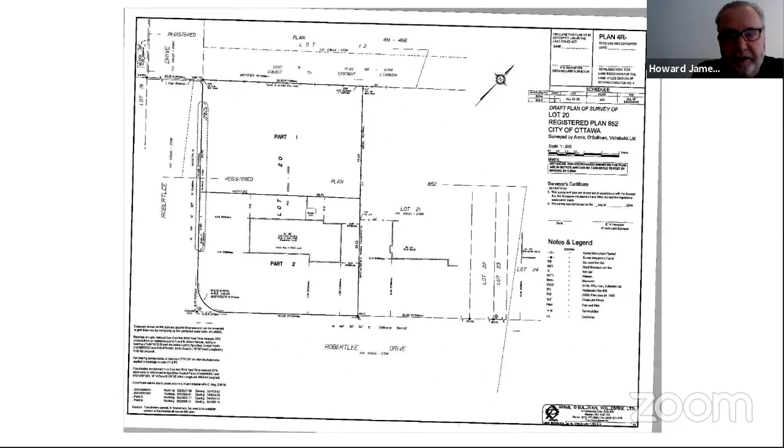So if we could move on to the next slide, please. So these are the minor variances that we discussed last time. We're going to a setback of 5 meters from the required 7.5, and an 18% coverage by the dwelling from a normal maximum of 15%.

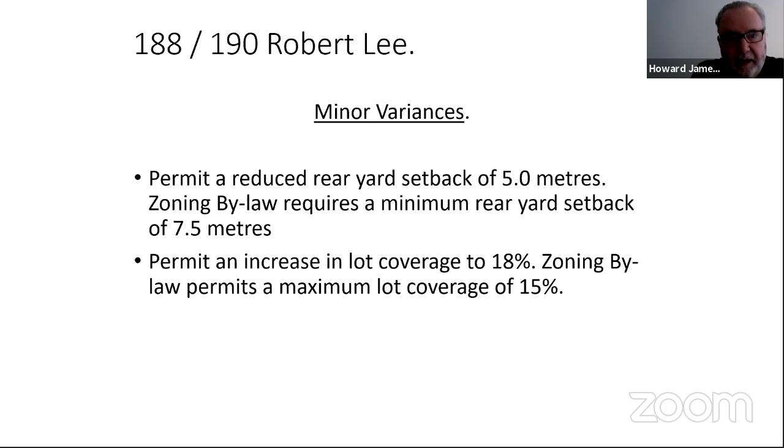Thank you, Mr. James. Mr. Walker, can you please comment on this application?

Thank you, Mr. Chair. The department has reviewed the proposal and continues to have no concerns with it. As it relates to the water feature that's on the adjacent property, the city's natural system team has looked into it and confirmed that it is a drainage swale and not a water course, and as such, there would not be a variance required from it.

Thank you very much. Any questions, comments, or concerns? Mr. Revort? None with respect to either application. Thank you. Ms. Chandler? Any questions or comments? None.